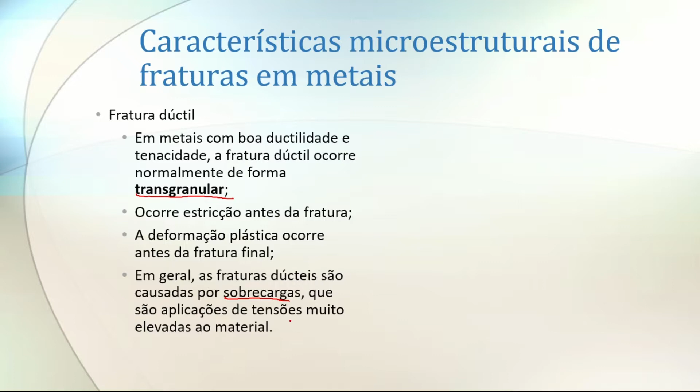Vai existir uma estricção antes da fratura. A deformação plástica ocorre antes da fratura final. E, em geral, as fraturas dúcteis são causadas por sobrecargas, que são aplicações de tensões muito elevadas ao material. Então nós vamos ter uma deformação apreciável, sempre tendo estricção, nesses dois casos, e deformação plástica antes da ruptura.

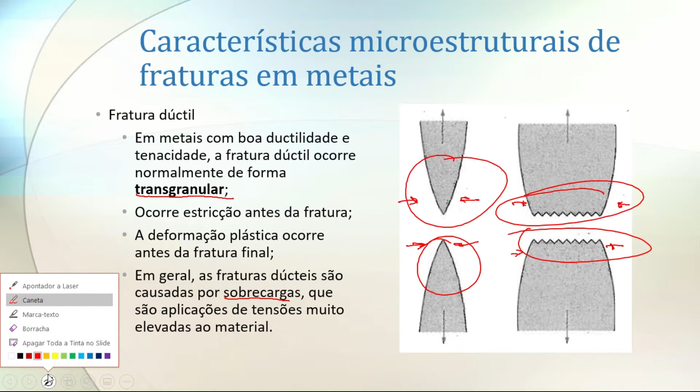Então, o que é que acontece? Começou a deformação, começou a ter estricção, começou a surgir as primeiras trincas, os primeiros vaziozinhos. Foi surgindo, então vários poros sendo criados dentro da estrutura do material. Então um poro vai se ligando com outro, que vai se ligando com outro, que vai se ligando com outro. Aqui o que é que acontece? Já tem um grande vazio dentro do material. Então, consequentemente, nesse ponto é onde começa a curva tensão-deformação a diminuir.

O que é que acontece aqui? Não tenho matéria nessa região e tenho nessa de cá. Então, o esforço que está se fazendo para deformar o material também é menor, porque não tenho material para suportar o esforço. Então, vai se deformando, continua se deformando, até nós termos um cisalhamento e a fratura aqui sair serrilhada, como nesse caso.

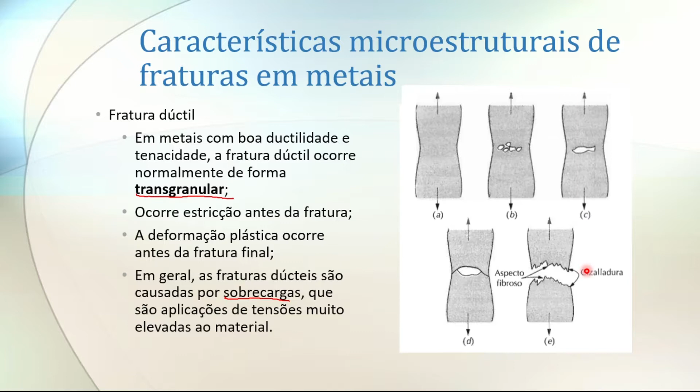E aqui está a forma, tem o grão e a fratura transgranular. Aqui mais ou menos por esse caminho aqui. Então tem umas falhas, as partes mais escuras aí são por onde está indo, quebrando os grãos.

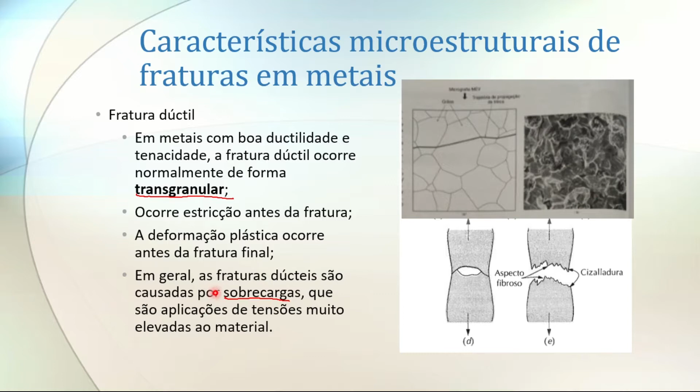Então, ele passa a ser frágil, consequentemente passa a ter um comportamento de material de fratura frágil. E se a trinca for muito grande, ou seja, se o defeito for muito grande, a ruptura também pode ser frágil. Então, as fraturas surgem geralmente quando a fratura é causada por impacto e não por sobrecarga. No caso da dúctil, a fratura surgia por uma carga a mais, ou seja, por um esforço a mais colocado no material. No caso da fratura frágil, surgem quando é causada por impacto.

Então, esse impacto, essa carga muito grande aplicada de uma única vez, impulsiona a propagação da trinca e a ruptura do material. Então, não existe, ou pouco existe, uma deformação plástica. E no metal, a trinca pode se movimentar à velocidade do som. Então, o movimento da fratura frágil, a ruptura é quase que instantânea. Então, ela começou, teve energia suficiente para se propagar. Essa energia suficiente se propaga, faz a trinca se propagar muito rápido. A trinca se propagando muito rápido, tem-se a ruptura catastrófica do material. Então, normalmente, as trincas se propagam em planos preferenciais, e esses planos são os planos de clivagem.

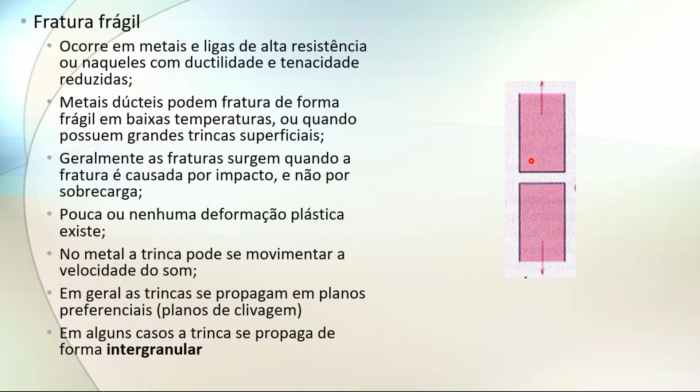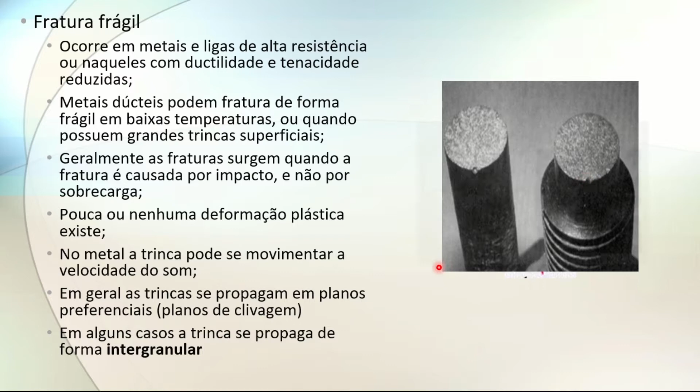E em alguns casos, a trinca se propaga de forma intergranular. Então, na fratura frágil, não temos praticamente empescoçamento, não temos deformação plástica, é simplesmente a ruptura parecendo como se fosse um corte do material. Simplesmente desta forma. Aqui está o início da falha do material. Então, eventualmente, podemos ter a propagação intragranular ou intergranular, que é através dos grãos.

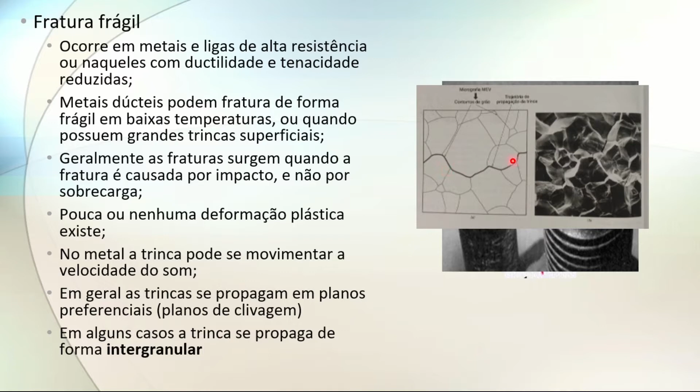E aqui nesse caso, como a gente já falou lá na frente, se eu tenho mais grãos e a fratura é intergranular, mais difícil vai ser a propagação da trinca. E uma característica da fratura frágil é que ela vai ter esse padrão em V. Então, se tem uma origem da fratura, e a partir desse ponto tem pontos ou veios saindo desta fratura, formando um caminho como se fosse desse único ponto, saindo várias vezes da origem do material. Então, está aqui a origem e aqui a propagação da trinca.

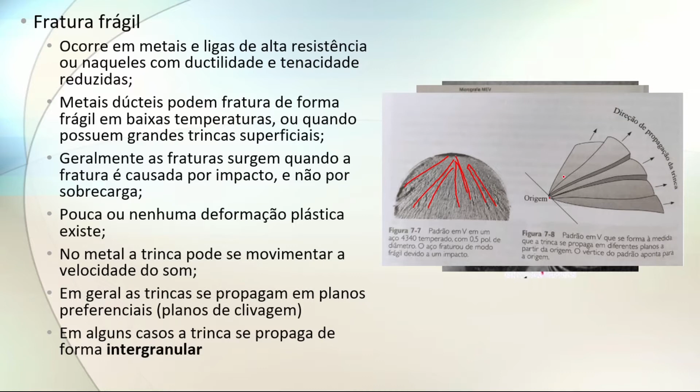Tudo isso para quê? Nós temos o grande problema dos materiais, principalmente em peças móveis ou que sofrem tensões cíclicas, que é a fratura por fadiga. A fratura por fadiga está diretamente ligada à tenacidade à fratura. Porque durante o processo de fadiga, que é a aplicação de cargas de tração e compressão em um determinado elemento, o uso do material nessas condições faz com que se crie trincas ou se induza trincas ao material. E, consequentemente, se nós temos trincas induzidas ao material, temos que saber qual é o comportamento deste material, ou seja, qual é a tenacidade à fratura deste material.

Então, basicamente, fadiga pode ser definida como sendo a queda da resistência ou fratura de um material devido à tensão repetitiva, que pode ser inferior ou superior ao limite de escoamento. É um fenômeno comum nos componentes sujeitos a carregamentos dinâmicos em automóveis, aviões, pás de turbinas, molas, virabrequins e outros maquinários. Então, um virabrequim, uma mola, e aí as helicezinhas de um motorzinho. Esses elementos estão sujeitos a tensões repetitivas.

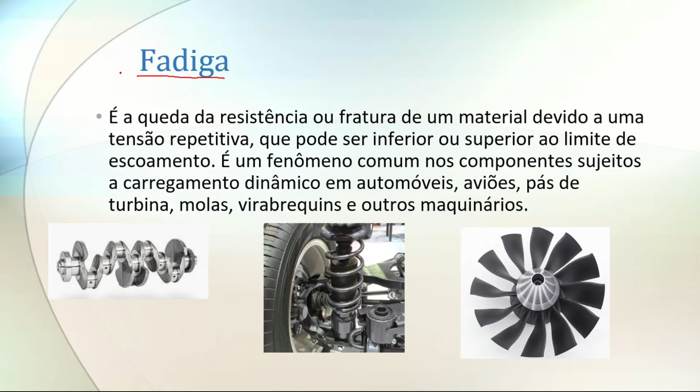Então, como é que se dá isso? As falhas por fadiga ocorrem normalmente em 3 estágios. Primeiro estágio: uma pequena trinca geralmente surge na superfície, frequentemente após um longo período de aplicação da carga. Então, se nós estamos criando uma pequena trinca, vamos cair todo no estudo lá da tenacidade à fratura.

Então, se nós temos uma trinca que vai surgir na superfície do material, basicamente você vai ter lá ciclos de tração e compressão. Esses ciclos de tração e compressão fazem surgir intrusões dentro do material, e essa intrusão provoca a trinca, provocando a trinca, segue todo o rito lá da tenacidade à fratura.

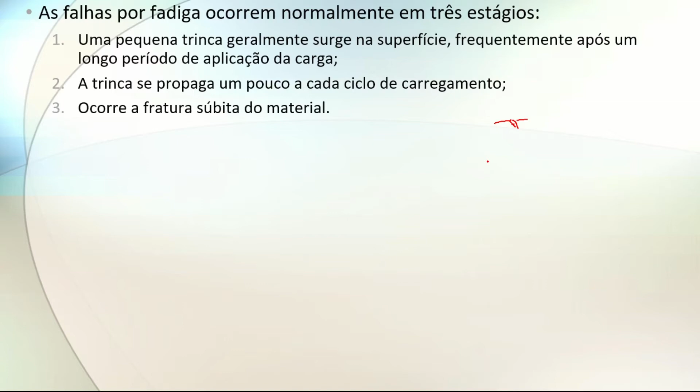Então, a trinca se propaga um pouco a cada ciclo de carregamento e ocorre a fratura súbita do material. Essa trinca, basicamente, pelo uso, ela vai crescendo até chegar naquelas continhas lá feitas, até chegar na tenacidade à fratura, que aí tem as tensões críticas que o material pode suportar, e aí vem a ruptura.

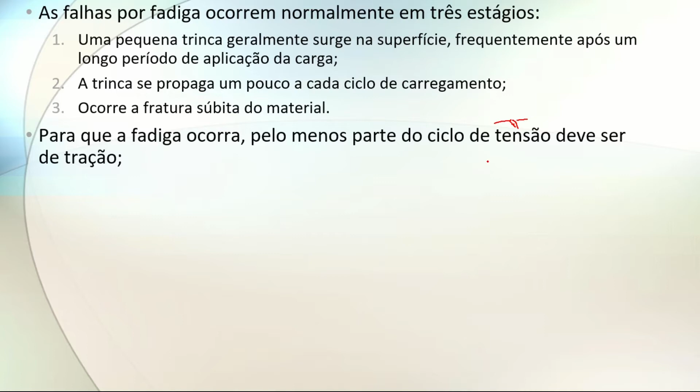Então, para que a fadiga ocorra, pelo menos parte do ciclo de tensão deve ser de tração. Em geral, os materiais metálicos e os poliméricos são mais susceptíveis à fadiga. Os materiais cerâmicos sofrem fadiga, mas por outros motivos. A fratura por fadiga é geralmente de fácil identificação.

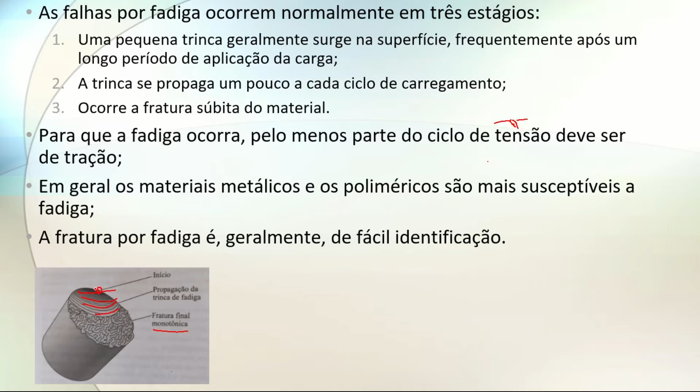Então, a fratura por fadiga normalmente tem início na superfície, aí depois nós temos ondas de propagação da trinca e até a fratura final, a ruptura final, que aí é sem muitas variações. Vem do início, propagação, ondinhas e a ruptura propriamente dita.

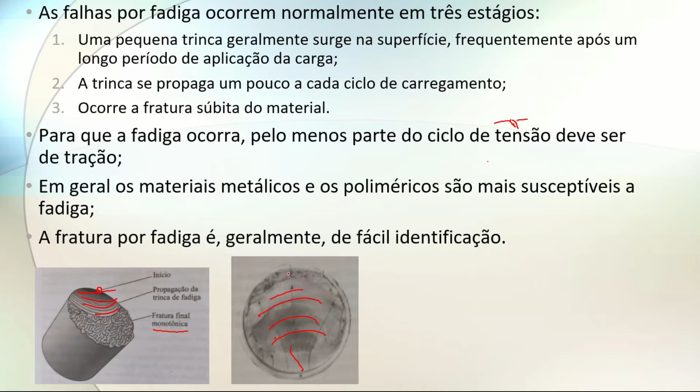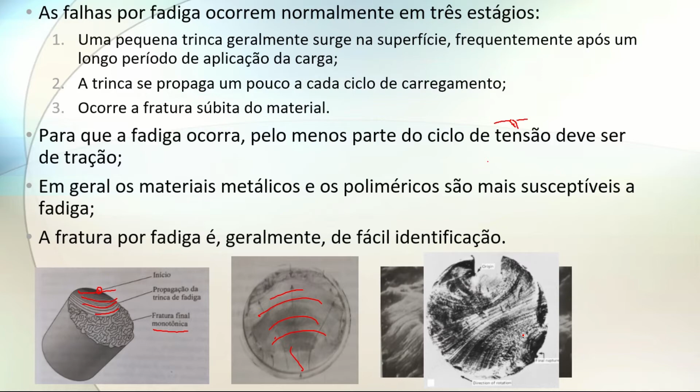Então, aqui, início, a propagação e aqui a ruptura do material. E aqui as ondinhas, tá? Não sei se dá para enxergar direito. Então: origem, propagação e a ruptura final.

Vamos agora ver um ensaio de fadiga, como se dá, tá? Basicamente, vai ter uma máquina e essa máquina vai ficar aplicando ciclos de tração e compressão ao material.

Fatigue test. Many everyday items are not loaded uniformly, but rather non-uniformly with periodically changing loads.

This is quite obvious. Aqui no início ele vai mostrar algumas peças passando por esses ciclos de carga, hora de tensão, hora de compressão.

In off-road biking, frames, handlebars and wheels are subjected to high alternating mechanical loads. It is just as obvious in the case of a garage door spring.

Mesma coisa aqui no caso dessa mola, tá? Hora ela vai ser tracionada, hora vai ser tensionada, hora vai ser distensionada.

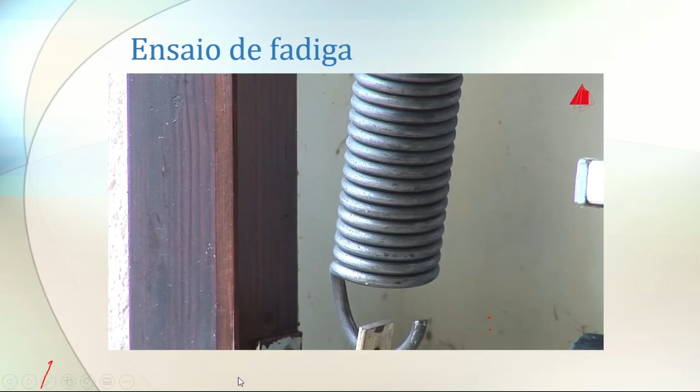The spring is unloaded when opening the door and loaded when closing the door.

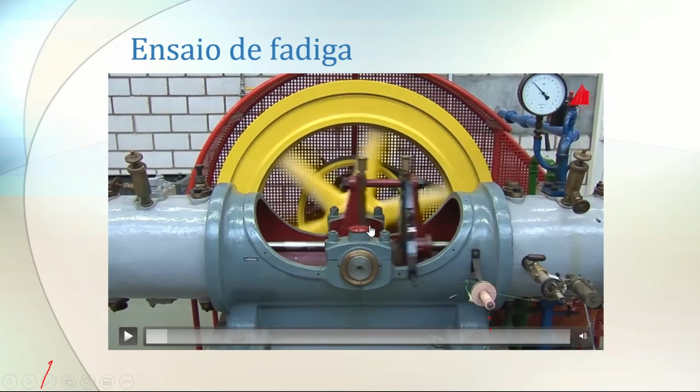The connection rods of this old compressor have endured a large number of rapidly changing tensile and compressive forces.

Even when cycling quite moderately in the city, many components are exposed to periodically varying loads without us being aware of it.

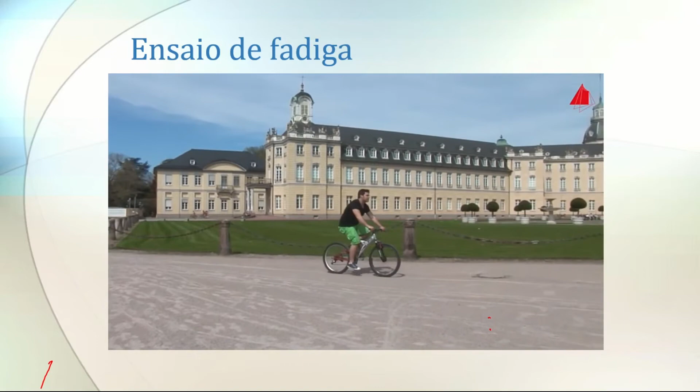The crank arms are alternately under load, then swing back almost load-free, are under load again with the rhythm of pedaling. The spokes, the pedals, even the individual links in the chain are stressed periodically.

Also, the railway bridge over the River Rhine, seemingly totally at rest, alternately has to bear the additional burden of a heavy freight train and then only its own mass.

Ponte também sofre com cargas cíclicas.

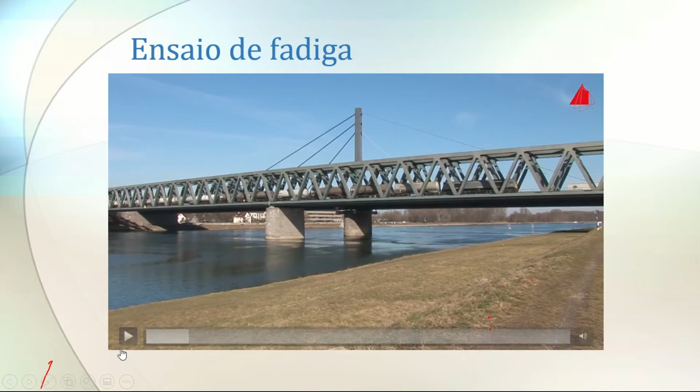Heavy freight train and then only its own mass. Aircraft experience quite different stresses during take-off and in turbulence than on ground.

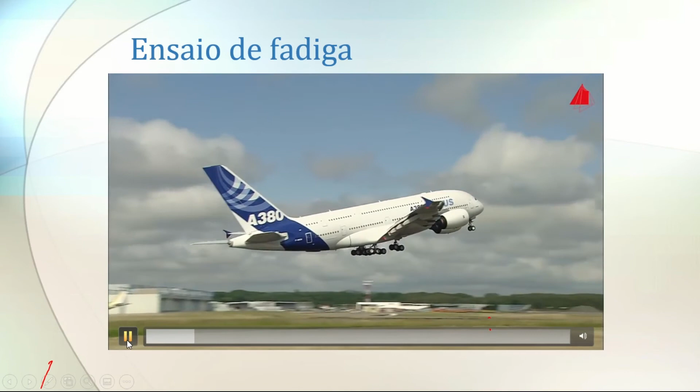Trem de pouso de avião também.

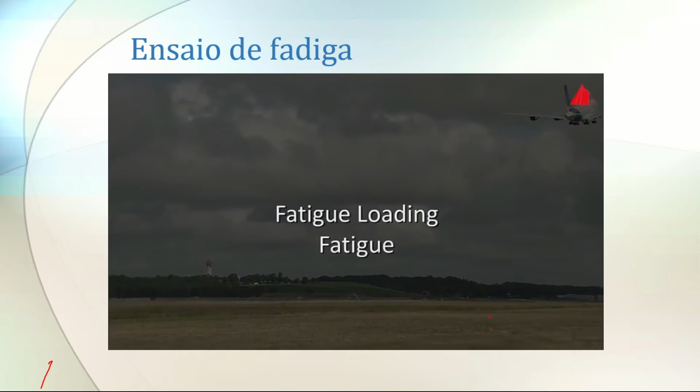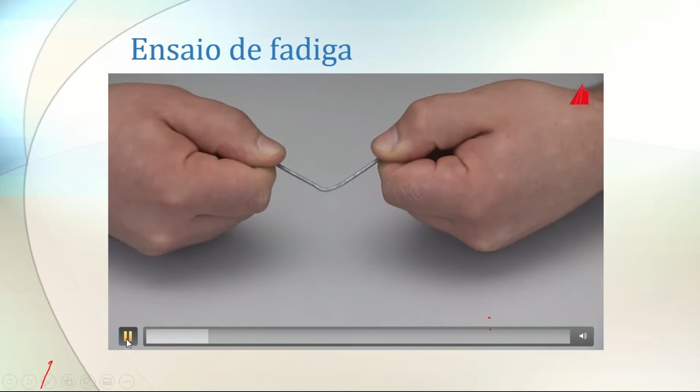This type of loading is generally termed fatigue loading, and the material responds to it with fatigue. The term fatigue is used because it takes some time for the failure to occur under repeated loads. The problem with materials is that they normally endure less at repeated loading than with a once-only load. The wire does not break when first bent, but bending it back and forth repeatedly leads to an early fracture.

This bicycle crank arm had only been able to endure the cyclic loading for a certain time before it broke. The fate of the garage door spring was the same. It had borne the opening and closing of the garage door about 60,000 times before it finally...

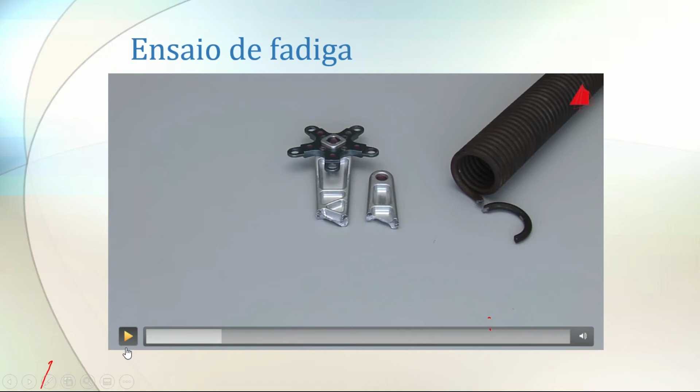Aí, falando da quantidade de vezes que, por exemplo, a molinha aí da porta da garagem teve que ser utilizada.

Fractured. The broken exercise equipment. A torn blade of a fan. A bandsaw blade full of cracks.

The broken screw. Todos os elementos aí que se romperam depois de muito tempo de uso.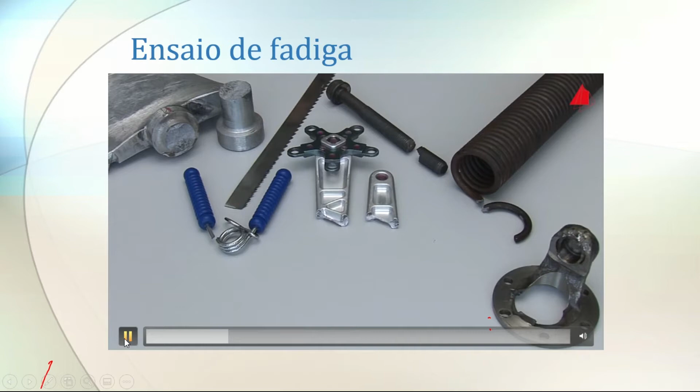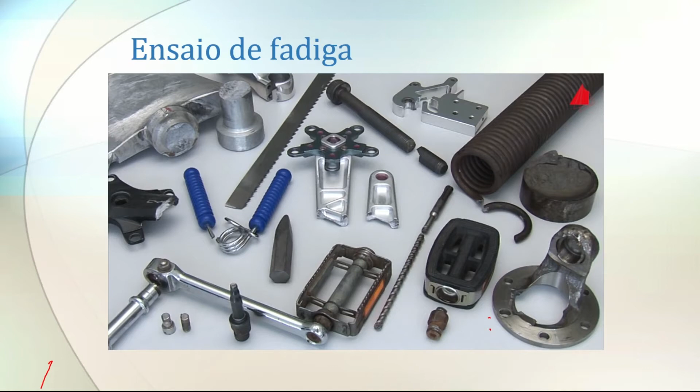A defective universal joint, and many other examples show how important this phenomenon is. Each day, thousands of items break due to cyclic, often repeated loading. How can we make sure that all these components withstand the cyclic loads? To achieve this, one has to test the materials appropriately. We intend to measure the fatigue strength of a frequently used steel in our laboratory.

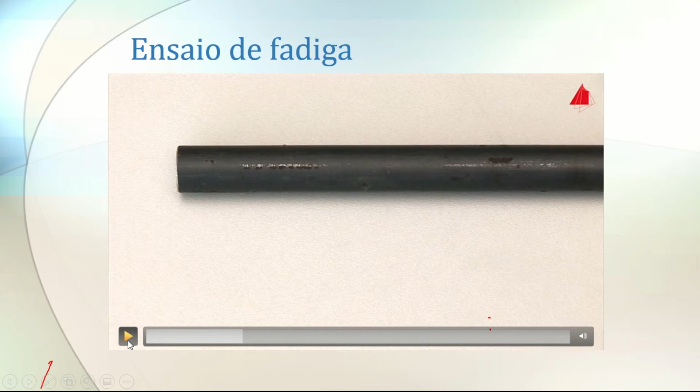Então, aqui seria feito para um aço, e aí para esse aço vai ser usinado um corpinho de prova para se utilizar na máquina. Hot-rolled steel rods made from the structural steel...

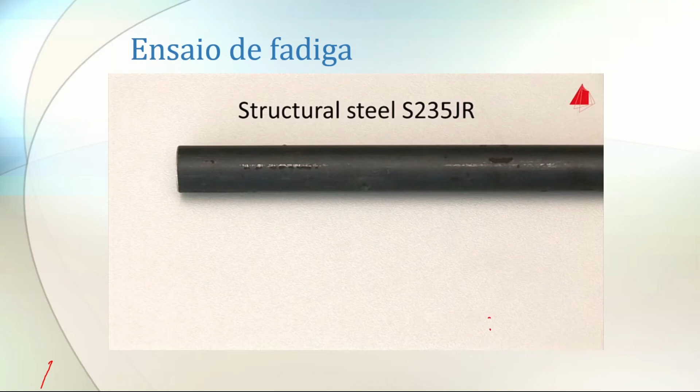S235JR are used as base material. In order to eliminate the influence of the surface and to stress the material in a well-defined manner, suitable specimens have to be machined...

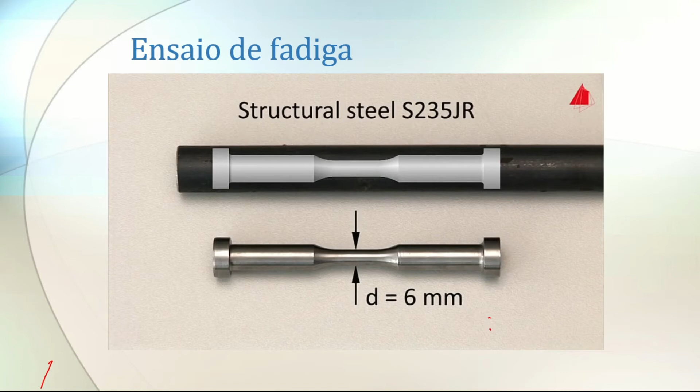This specimen type would be ideal. The shoulder-shaped ends have been designed for safe gripping. The actually tested region is cylindrical with a diameter of 6 millimeters.

The material tester goes to the workshop to get 10 specimens manufactured. This is a CNC, an automatic lathe that performs the machining process.

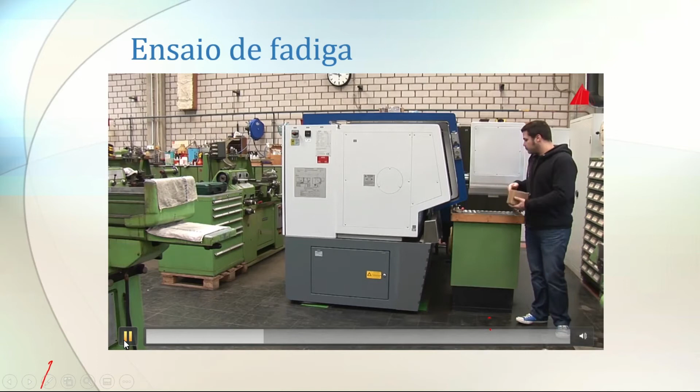From the rods, not just one. All of the specimens are made as identical as possible.

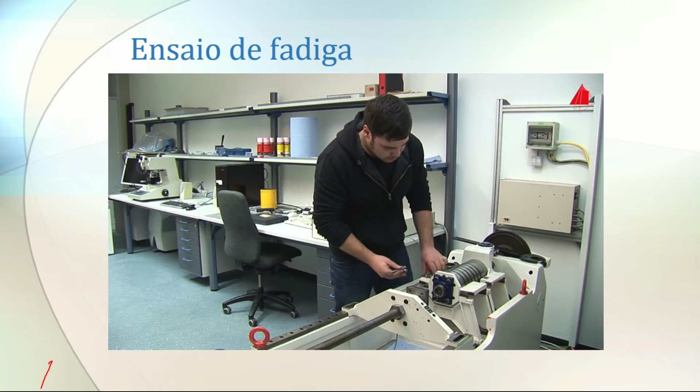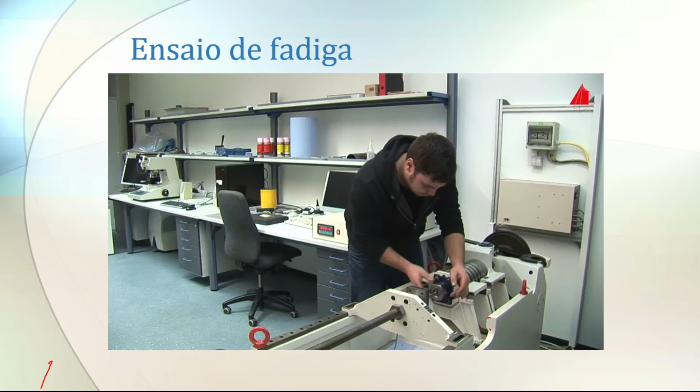In the lab, he has all specimens ready for use and picks out the first one. He mounts the specimen carefully and securely into the fatigue testing machine. Together with two half shells, he inserts one end of the specimen into the right specimen grip. With a union nut, he locks the right end of the specimen. Likewise, he mounts the left end into the left specimen grip and tightens the nuts. The preparation is now complete.

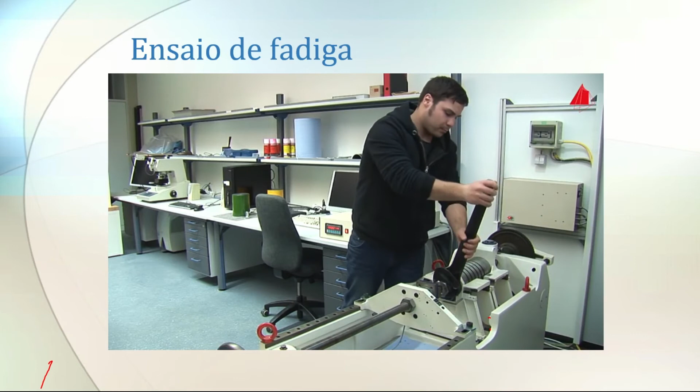The material tester then selects the appropriate test parameters on the control computer. He intends to load the first specimen alternately with a tensile force of 7 kilonewtons and a compressive force of 7 kilonewtons. The mean force is 0.

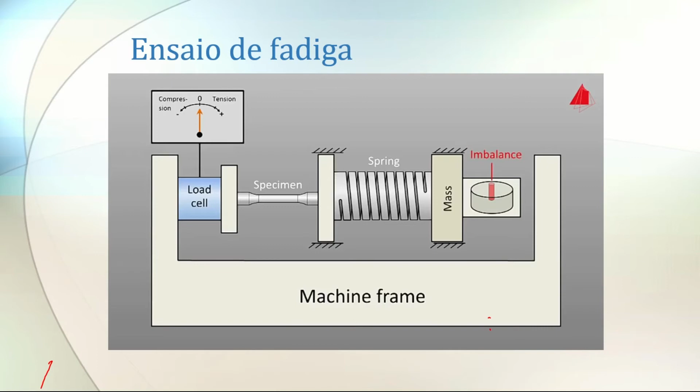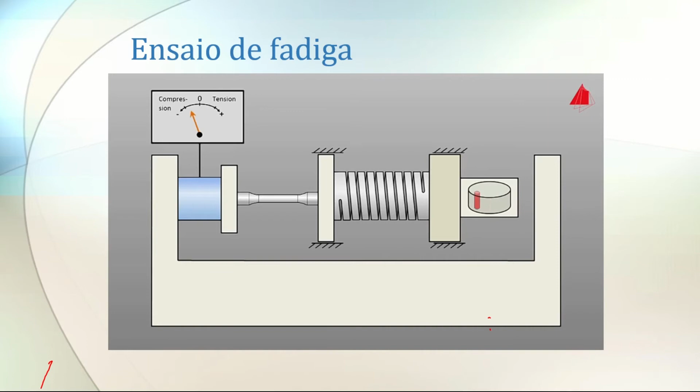The specimen is connected at its left grip via a load cell to the machine frame. At the right grip, a spring is mounted, and there in turn a mass. An imbalance stimulates the mass to vibrate. Longitudinal guides prevent the mass from vibrating in the transverse direction. Via the spring, the test force acts on the specimen. By varying the excitation frequency of the imbalance, the test force can be controlled. In our case, the specimen is loaded with about 25 cycles per second.

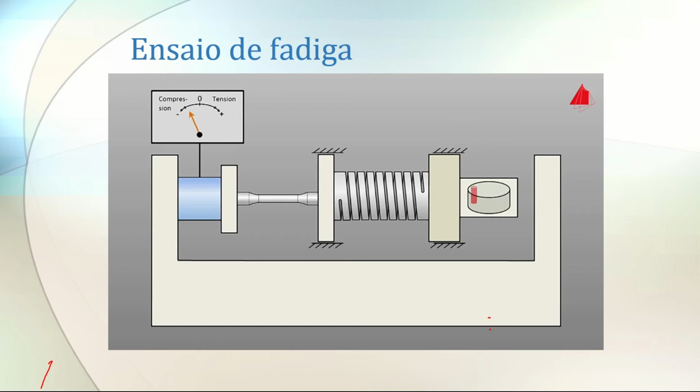Meanwhile, the first specimen has already endured over 300,000 load cycles and still seems to be intact.

In reality, however, several cracks have already developed starting from the surface, the so-called fatigue cracks. With each load cycle, they grow a bit further into the specimen.

A crack appeared. The biggest crack gains the upper hand, grows the fastest, and finally leads to fracture. With each moment the crack increased until it reached rupture, after 381,000 load cycles.

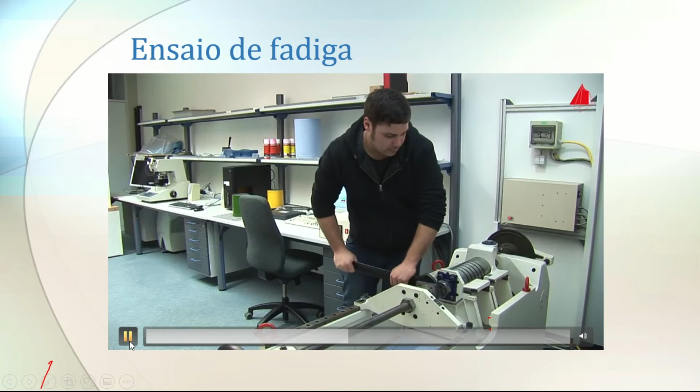The first test is finished. The material tester removes the fragments cautiously and inspects the fracture surfaces.

At first glance, the fracture surface looks unimpressive. A closer look reveals two regions.

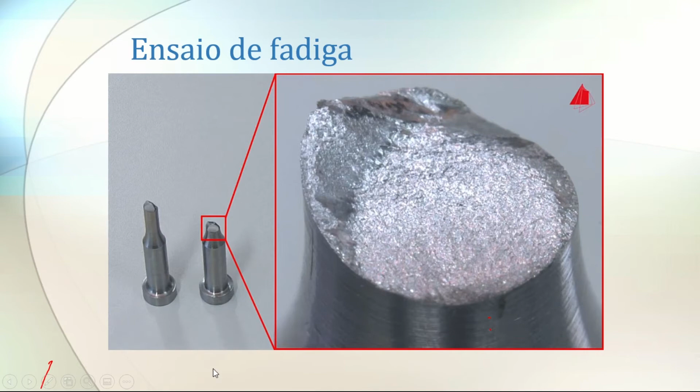The rather dull, predominantly flat fatigue crack propagation area and the rough residual fracture area. The residual fracture area results from the final catastrophic rupture. The fatigue crack propagation area has developed during the cyclic growth of the fatigue cracks starting at the surface of the specimen.

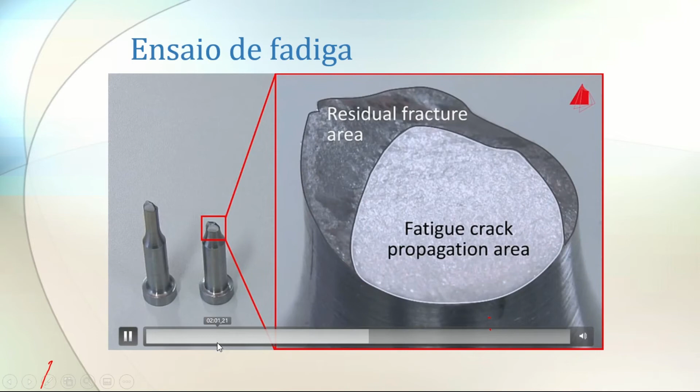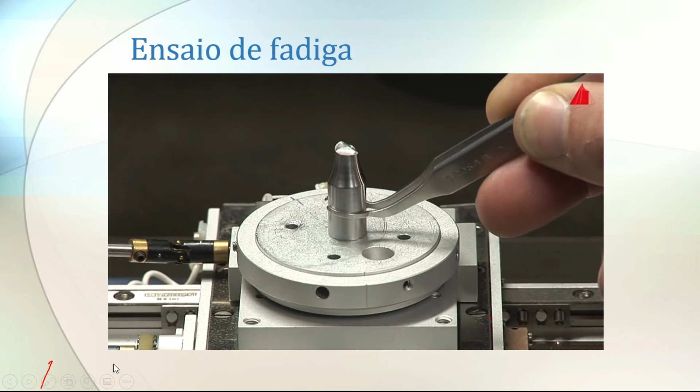What does the fatigue crack propagation area look like at higher magnification? One of the fragments is carefully placed on the specimen stage of our scanning electron microscope.

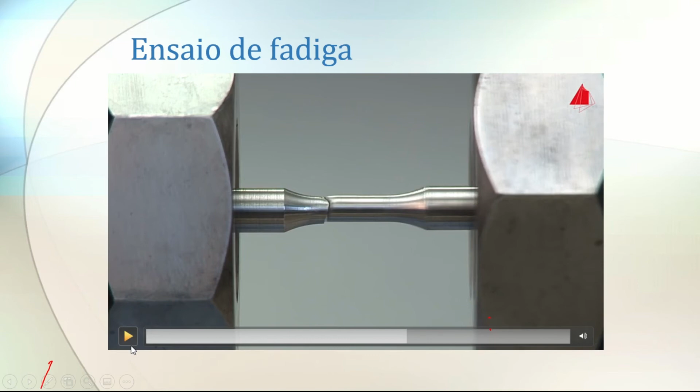Under the increased load, the specimen is only able to withstand 3,600 cycles to failure, so as the stress increases, the number of cycles decreases.

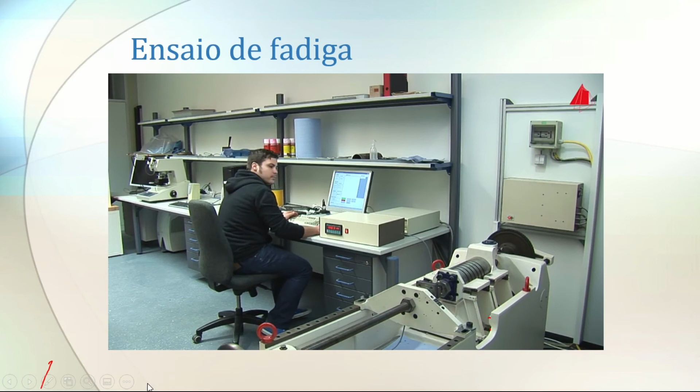Under this reduced load, it does not break even after 3 million load cycles. It withstood up to 3 million cycles.

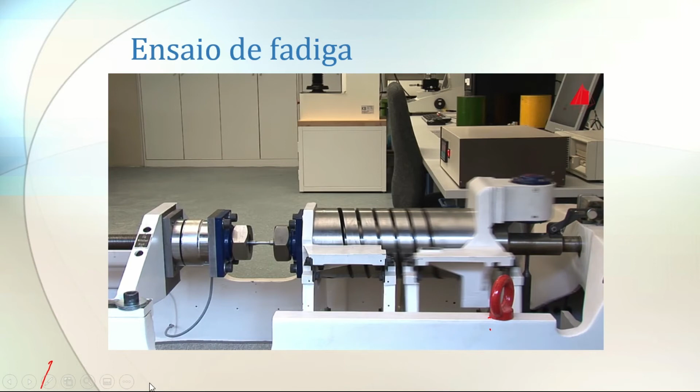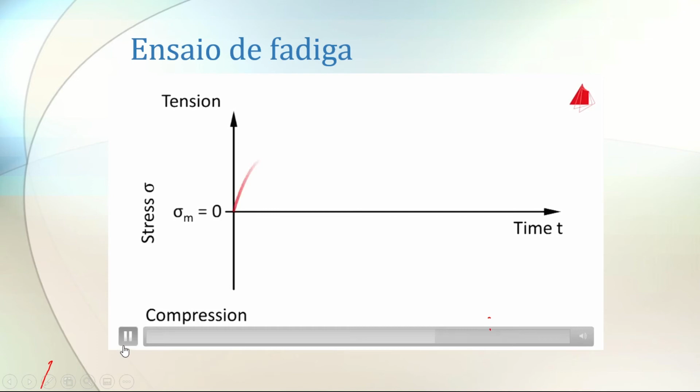To compare materials in a fair way, the different cyclic loads are converted to the respective stresses acting in the specimen. In this case, the stress alternates sinusoidally around a mean value, which is termed mean stress sigma m. In this series of tests, the mean stress is 0. The stress amplitude is labeled with the symbol sigma a.

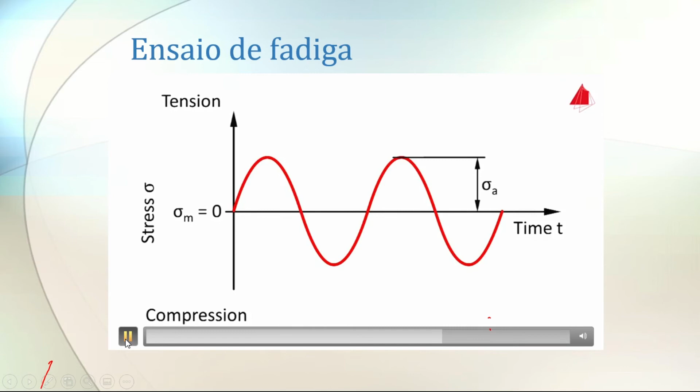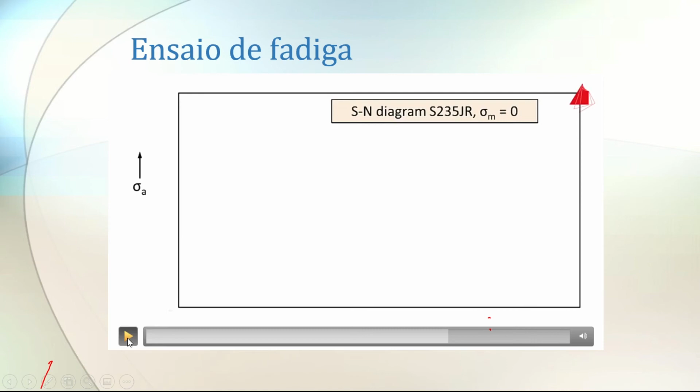For graphical representation, the SN diagram is used, also termed Wöhler diagram. In an unusual manner, the predetermined variable is plotted upwards on the y-axis.

It is the stress amplitude sigma a. And the result of the test, the number of cycles to failure n, is plotted to the right on the x-axis. To fit small and large numbers into the diagram, the x-axis is not scaled linearly, but logarithmically.

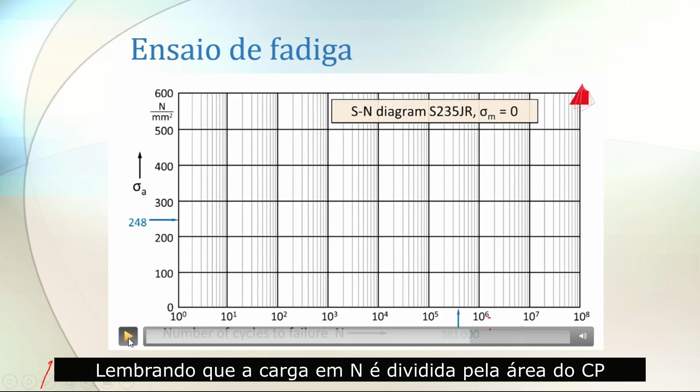The first specimen was loaded with 7 kilonewtons. This corresponds to a stress amplitude of 248 newtons per square millimeter. Under this stress amplitude, it broke after 381,000 load cycles. The second specimen was loaded with 7.5 kilonewtons.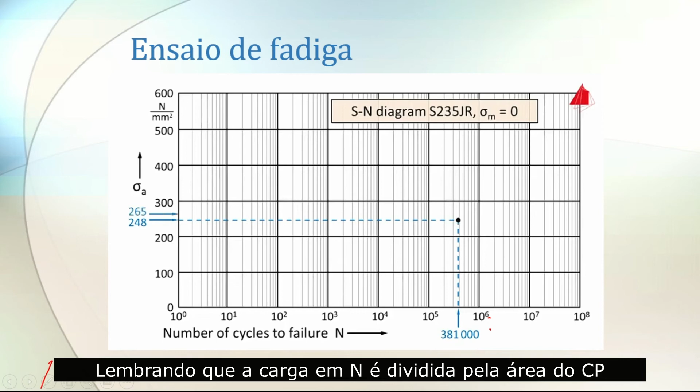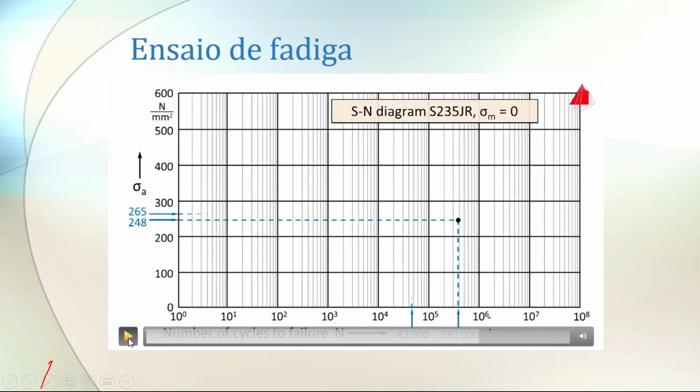This corresponds to a stress amplitude of 265 newtons per square millimeter. Under this stress amplitude, it broke after 43,600 load cycles. And these are the results of the other specimens which have been tested by us.

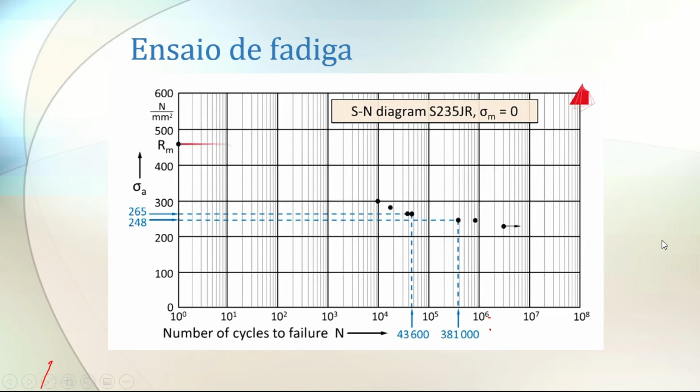When additional specimens are tested and the results are displayed as a curve, it becomes clear that this material will not break below a certain level of stress amplitude, even after a very large number of cycles. This stress level is termed fatigue limit sigma capital A.

For most steels with body-centered cubic structure, the fatigue limit is reached after 10 million load cycles at the latest.

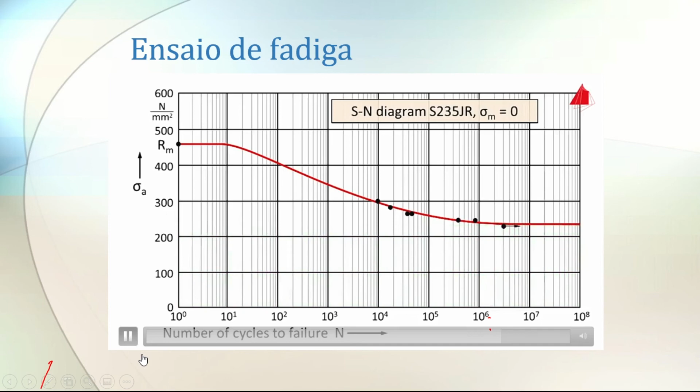It must be noted that the experimental results scatter considerably. Therefore, instead of a sharp curve, a statistically defined scatter band is commonly used.

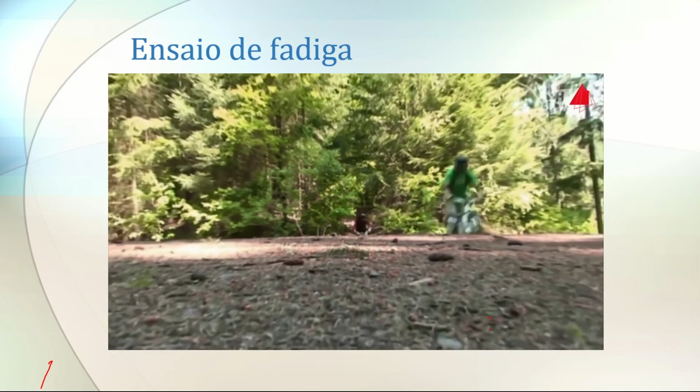Of course, most users don't load their components with a constant cyclic load, but rather in an irregular manner. Therefore, these components have to be tested under this type of loading, termed operational loading.

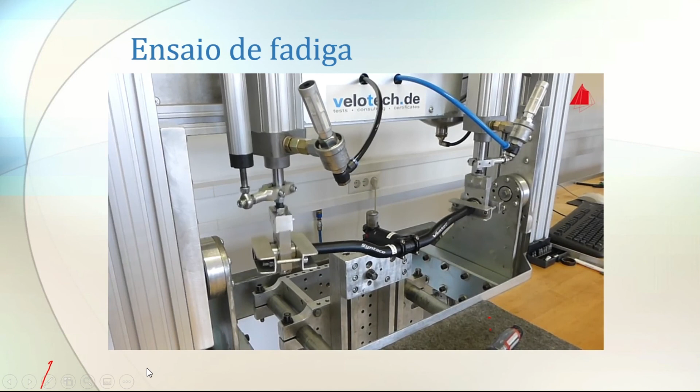Moreover, the fatigue strength does not only depend on the material. The mean stress has an important influence, along with shape, surface quality, environmental conditions, and much more. Not an easy story.

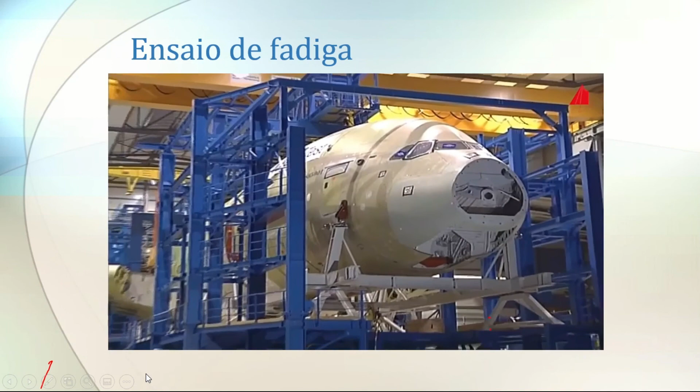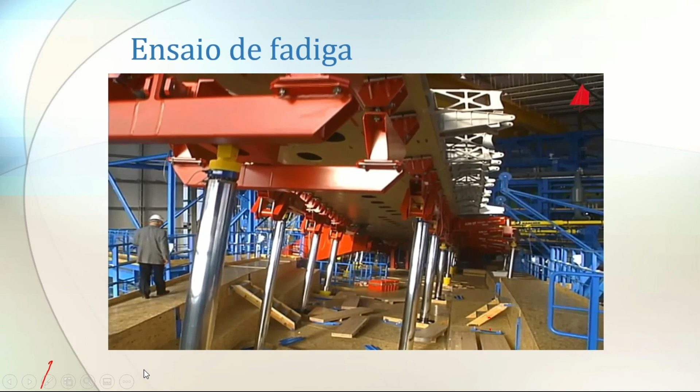Before an aircraft is allowed to take off for the first time, it has to go through extensive stress tests. The wings and many other elements are cyclically loaded in large test rigs. This later ensures the safe operation of the aircraft.

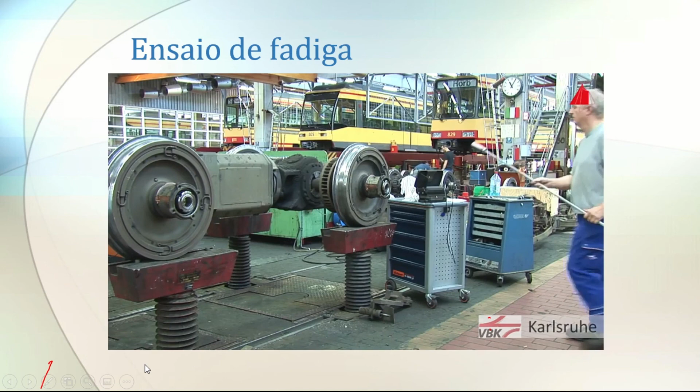Nevertheless, particularly important components are repeatedly examined for fatigue cracks in the course of operation. The tram, for instance, has to go into the test hall at regular intervals. Experienced staff use ultrasound to examine special components, especially the wheel set axles.

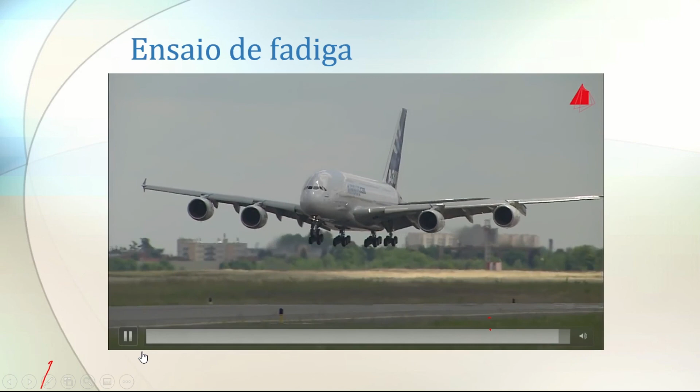To check whether they are still in perfect condition. Aircraft are also inspected for fatigue cracks at reasonable intervals. This helps us to depart for air travel without worry and land again safely.